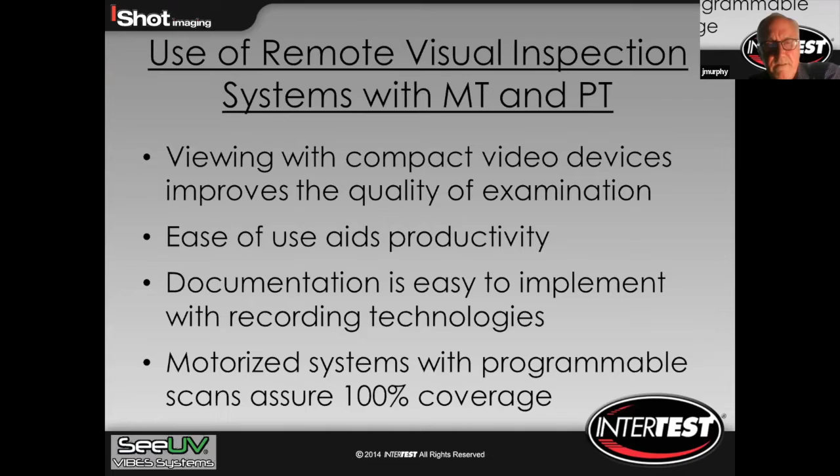There's a number of different ways to use the video equipment: both manually inserted and automated. Now we get into the motorized and programmable scans, and these become particularly interesting because they're completely repeatable, whereby we have a fixture that holds a part, and the camera will scan internally or externally as the case may be, and we can repeat that same inspection on thousands and thousands of parts.

As I mentioned a few moments ago, internal surfaces definitely pose challenges to any examiners, and compared to the traditional mirror on a stick, we can definitely do a lot better with the video components.

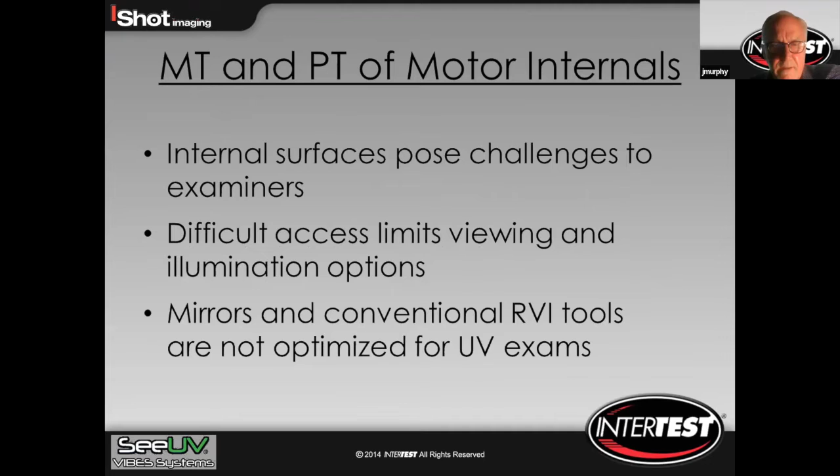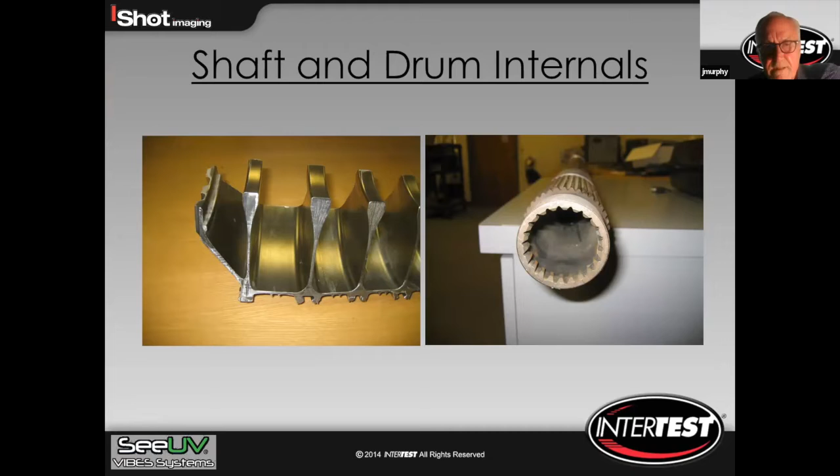We also get into these components I started to describe a little earlier. Some of these probably look quite familiar to many of you: shafts, and internals of housings. This is a cross section, but with internal webs, and in many cases these have to be thoroughly inspected in all these webs. So with the automated motorized systems, we can set up a part in a fixture and just push the button and let the equipment scan the part.

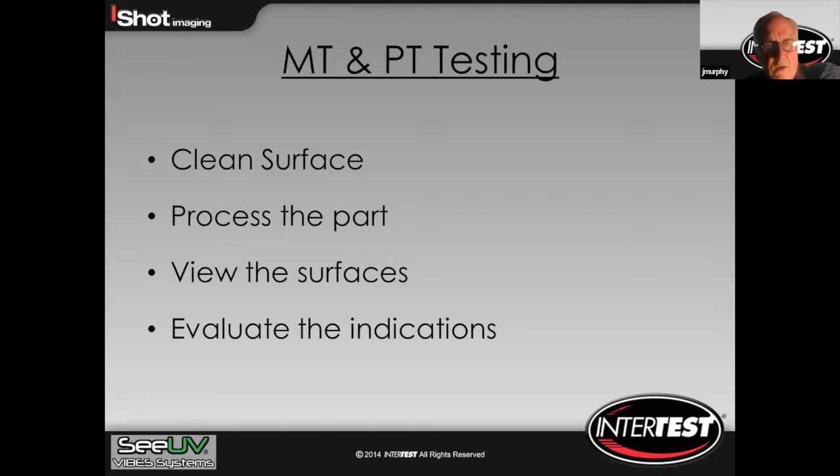And once the information is archived, the examiners can evaluate any indications and reject or accept the part. And in most cases...

Cameras are designed for white light, and UV tends to be hard to view, but we use filters, and it tends to really optimize the imaging and enhance the view for the operator. Now, again, it's a function of high quality equipment and control of the process, both moving the part and or the camera, to make a repeatable inspection.

Now, in terms of UV, in the same manner with white light inspection and optical equipment, resolution of optical equipment is measured worldwide. What we call the gold standard is the United States Air Force 1951 resolution chart. And it's just a chart. It's got lines, horizontal and vertical, in 9 different groups with different elements in each group.

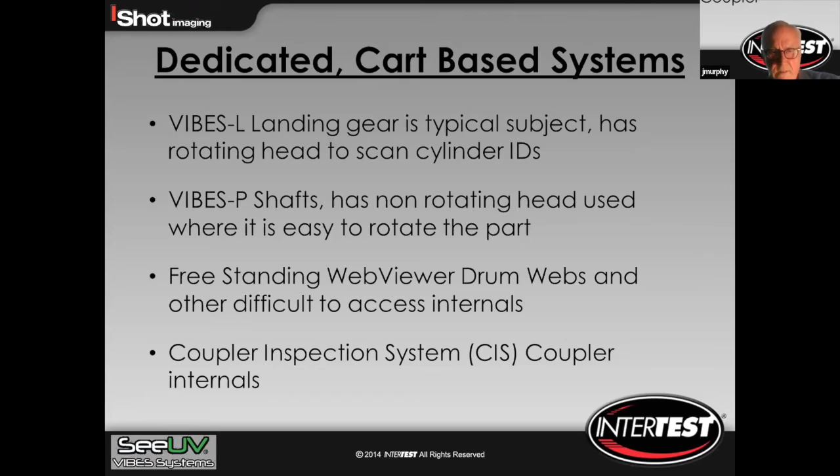So in its basic form, and many of you may have seen similar equipment, although I believe currently Intertest is one of the only manufacturers in the world of these types of systems. This system shown here is a cart-based system where we have the camera control programmer system, viewing monitor, recording and lighting systems, all on a cart. This particular one is designed for landing gear inspection.

Now, we can make these in various configurations, and it's available up to some of the longest landing gear that I've seen, on the 380s and so on. They're 20 feet in length. We can accommodate just about any situation.

And so just go back to the cart. In the landing gear situation, this pole, this system, is on two different axes, whereby we can raise it or lower it, and it would be inserted through the internal section of the landing gear assembly. And when it's inserted, it can be orbitally rotated. The insertion pole can be orbitally rotated, so it can scan internal circumferences and various diameters. We can accommodate various lengths, direction of view, and just any configuration that you can throw at us, we can handle.

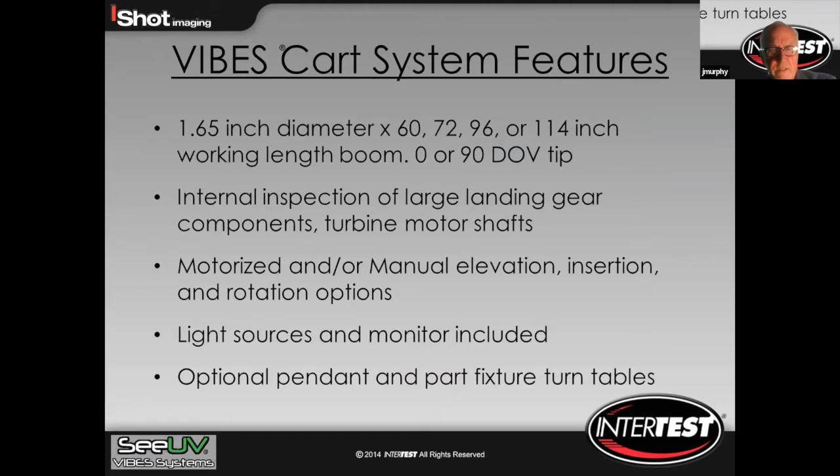So, and now similar situation, this would be for a drum or a cylindrical part. And in this case, instead of inserting it through a landing gear, this is in a drum with webs inside, and the camera will scan, and the operator can view and store the images.

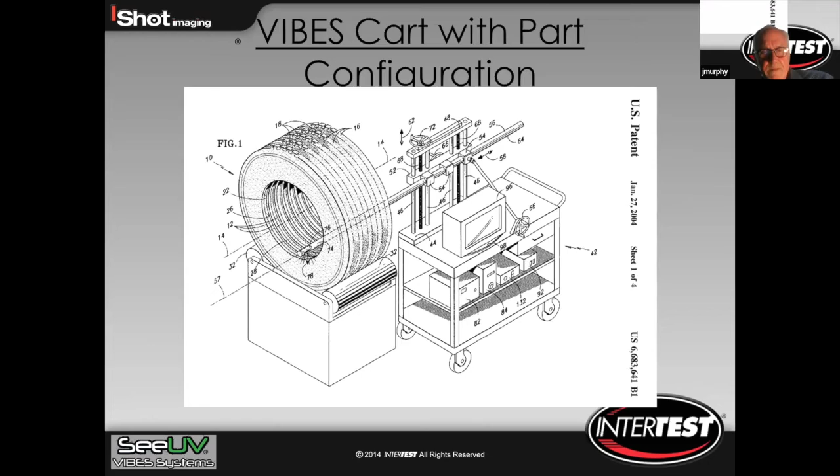Generally speaking, for the part shown here in this depiction, we would have a proper jig made up to suit that part, and the actual inspection process is programmed so it's repeatable. So at the push of a button, the operator can repeat 10 of those parts in exactly the same manner and create a log of the inspections.

The cameras, for many of these inspections, we build right in our New Jersey facility. They're high resolution - we're into the millions of pixels now in terms of image quality. Definitely in your HD high definition range, with both UV and white light on the tips. In the side view configuration, exactly the same idea. Again, all built in America.

The cameras also have a device to quantify the size of a defect. We have a series of little tabs that go in front of the image, whereby the operator can apply the tab in front of the image and say if it's a 1/8 diameter, 0.125 diameter indication or smaller. It takes the guesswork out of it. It's not a true measurement function, but it certainly will give the operator an indication of what size defect he or she could be dealing with.

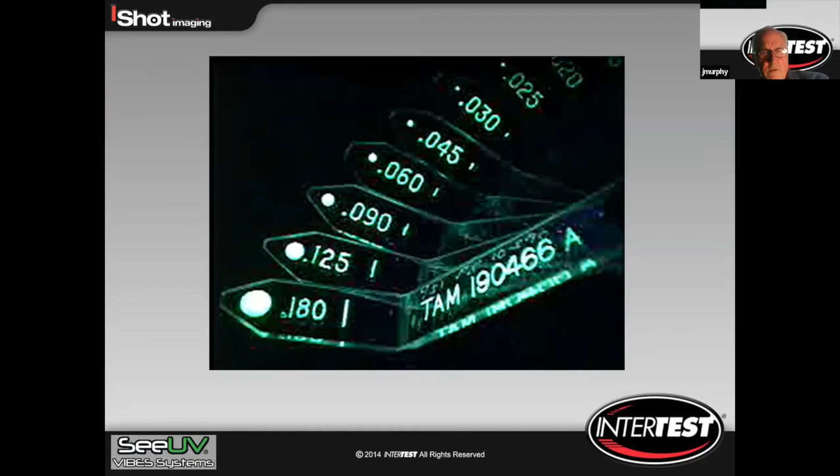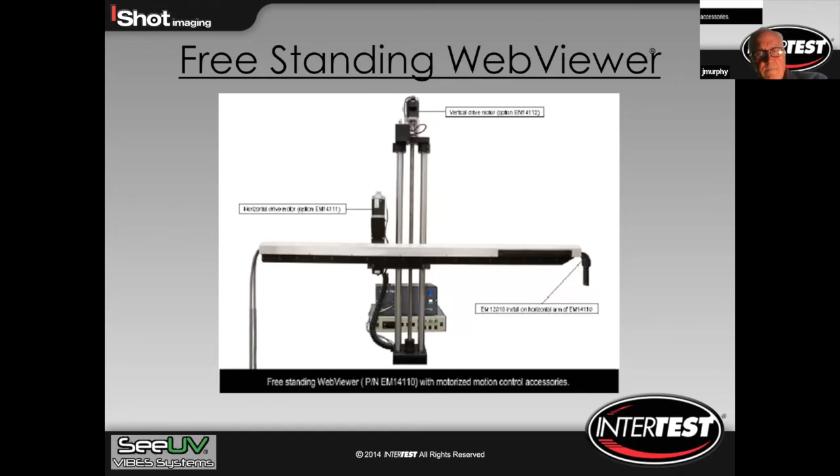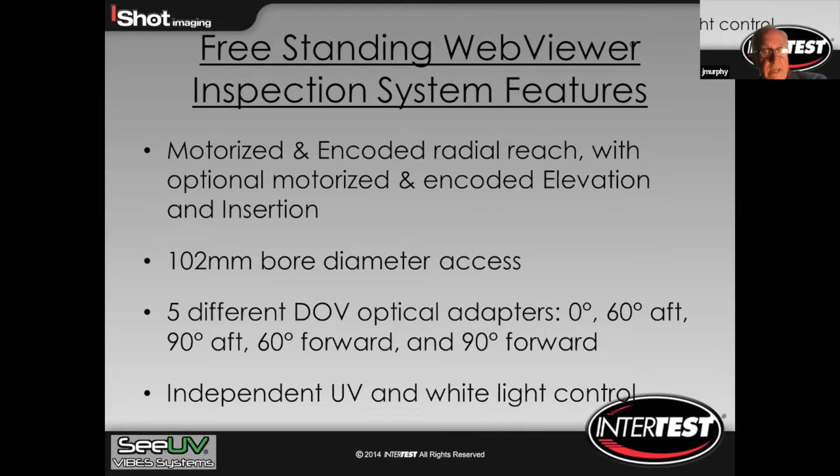Now, when we get into some of the more complex parts, same idea, insertion on a couple of different axes, but the camera position is arranged a little bit differently. As we go along, I'll show you with the web viewer. We would go into a bore, and the camera will turn to a 90-degree side view type position, and we can use white light and UV on these systems as well, switching back and forth.

So you can see here a pretty good depiction. The camera is rolled out through an articulated sheath that will deploy it right down in between the webs. Very, very simple, again, automated. When placed inside the part, at the push of a button, this system will just go through its cycle and view between every one of these webs.

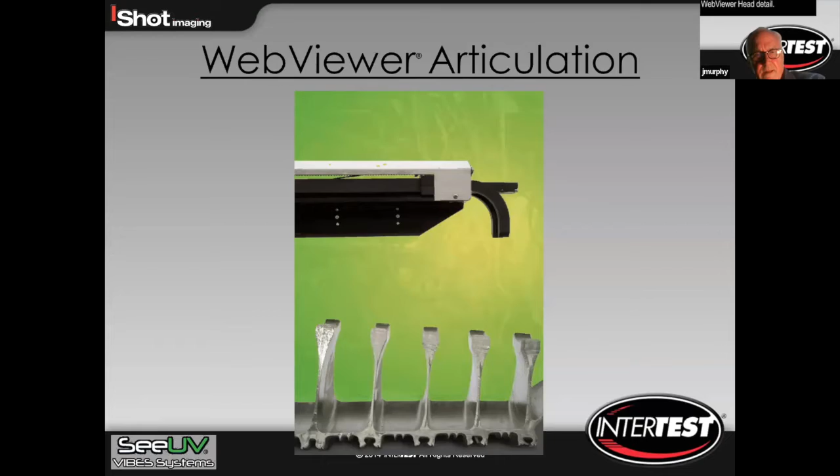I have a little better idea of what we'll be doing with the cylindrical components, and I think it gives you an idea if you just think about how difficult these parts would be to inspect in a more traditional manner with a mirror or just by eye. So again, it's repeatable. We can store all the images and create an archive for the whole life cycle of the component.

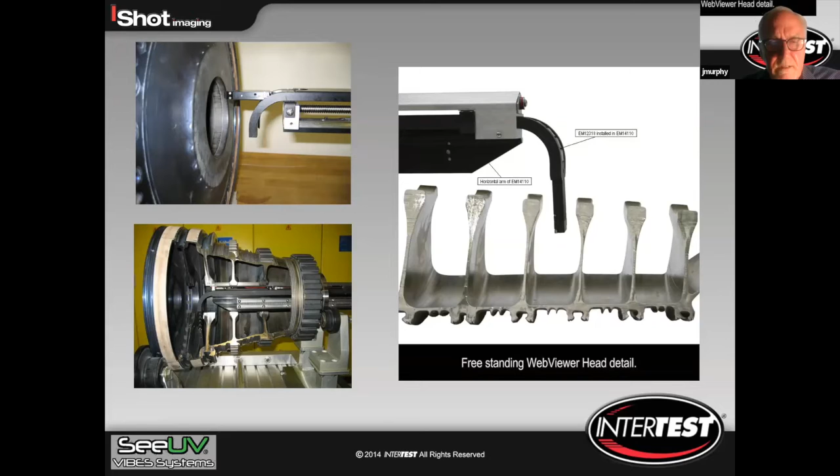There's various different configurations, so really we can see at any angle - 0 degrees, 60 degrees, 90 degrees - whatever suits the situation. And very simple cart format, both in manual and fully motorized carts.

I'm not sure what is in use in many operations in Mexico, but these systems are very, very common at the MRO shops throughout North America and Europe. Many of the major manufacturers in their MRO operations use these every day.

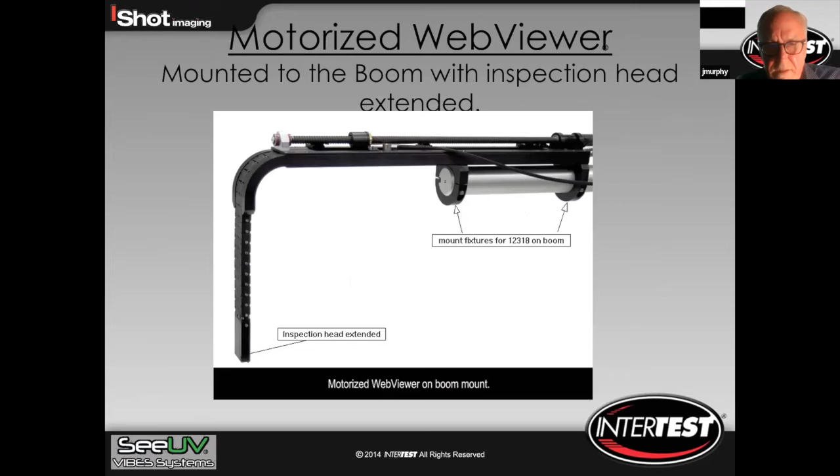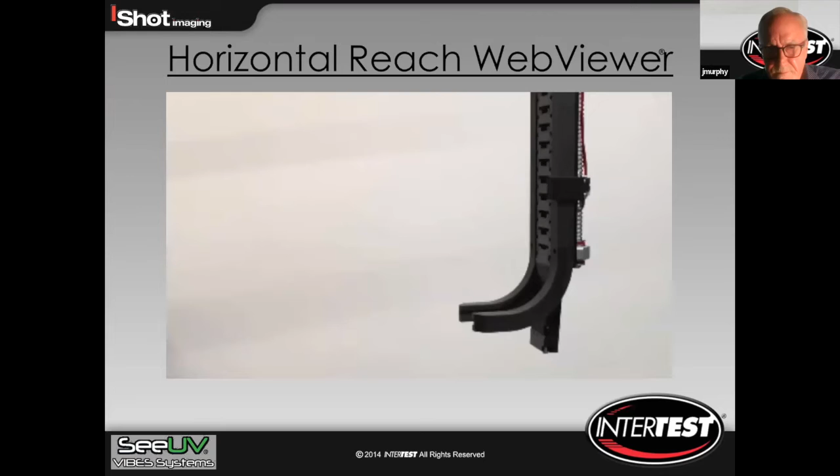A little more detail on the camera boom and so on. It's just a very simple device, and controls - there's both wired and wireless remote controls. We can configure these also to do cylindrical parts in a vertical position. So really, whatever you can throw at us, we've either done it or we can do it.

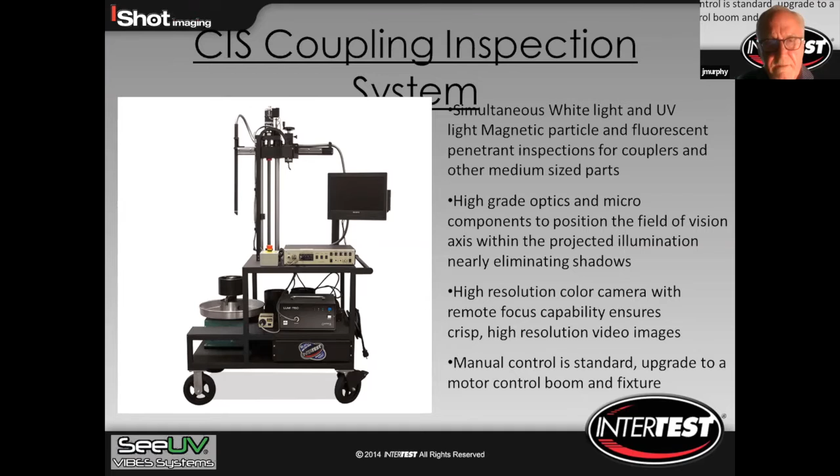As I said before, the traditional UV fluorescing inspection is well known for many, many years - most of the last century, people were using it as an inspection technique. But on the motorized cart systems, we've been manufacturing these for only about 25 to 30 years now. So it is just really catching on everywhere.

Various other fixtures and so on. Now, in addition to the carts and so on, we still use and recommend a lot of UV instruments that would be more of a manual process - the video or UV borescopes and pole camera systems.

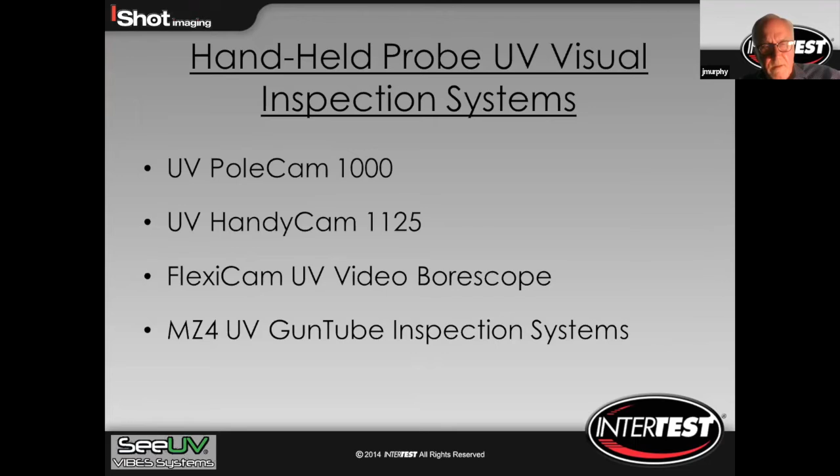Here's a good example of a manual system for manual insertion on simpler parts. This can just be deployed by the operator and manually rotated and so on, capture the images, store them on the DVR that's built in.

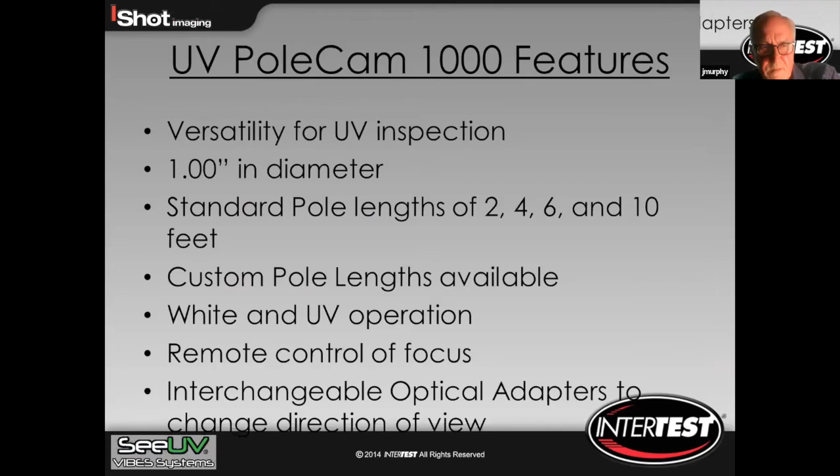And pole cameras, again, we make them in many different lengths. I think I've seen them over 24 feet in length for various applications. All that is in our New Jersey location, with different tip adapters to suit just about any situation.

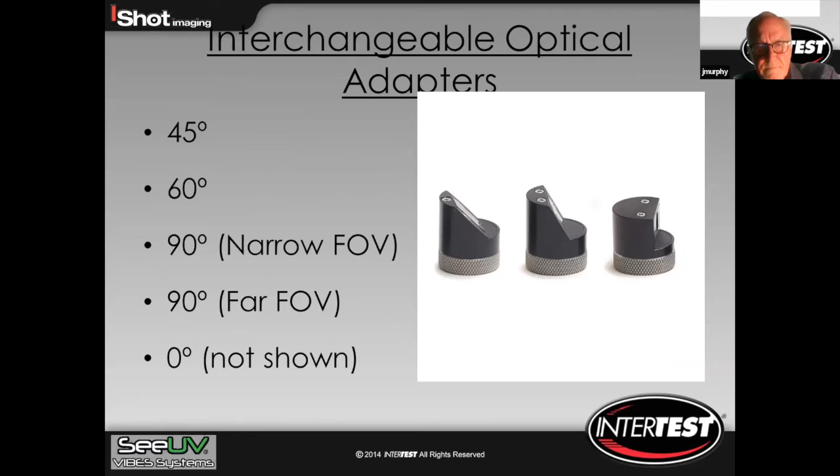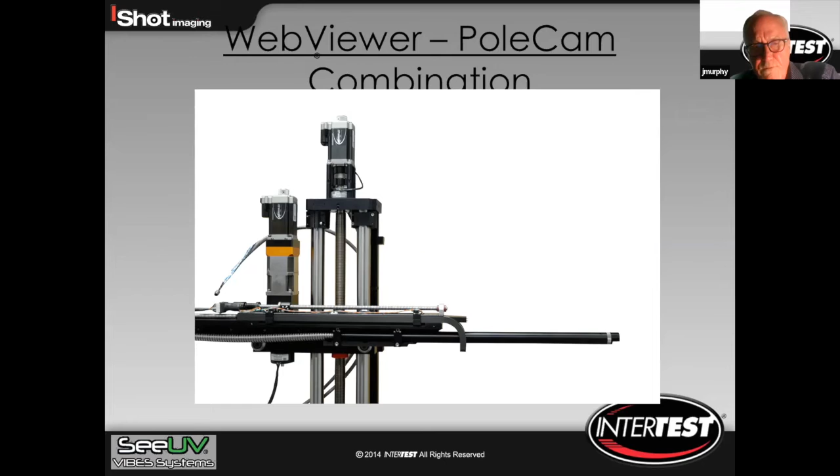The two systems that I was showing you, both the pole camera and the system for the web viewer, they can be totally combined. So we have many customers that like to have a very versatile system. Whatever the customer's needs are, we certainly build them. They can be quite complex, then right down to some of the simplest instruments, as I'm showing you right here, for manual handheld insertion.

This particular unit here would be generally used in addition to the more traditional handheld UV type inspection, where an operator can simply hold the HandyCam and view the images of a surface that he can reach with his hand manually. You could control the focal and zoom and so on.

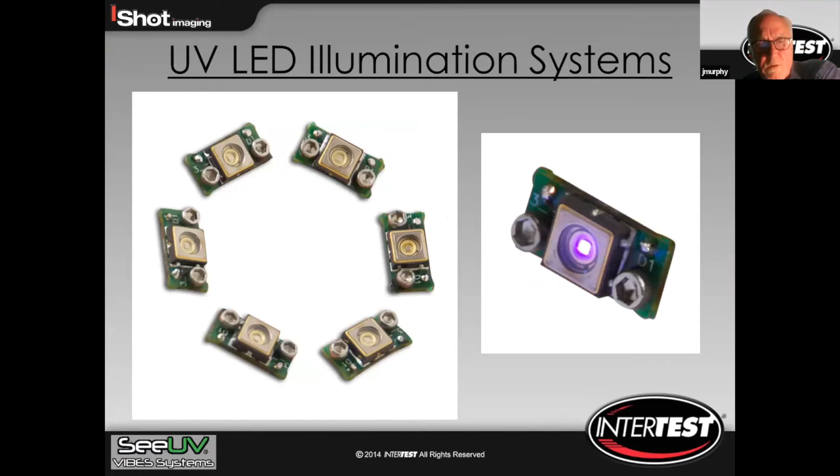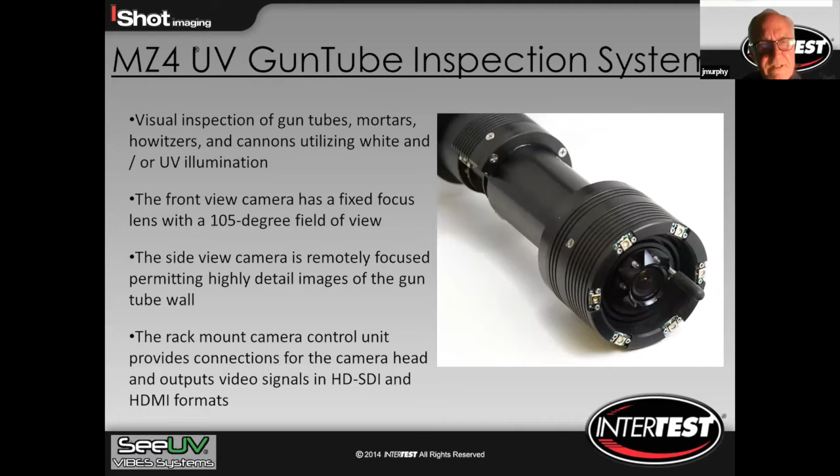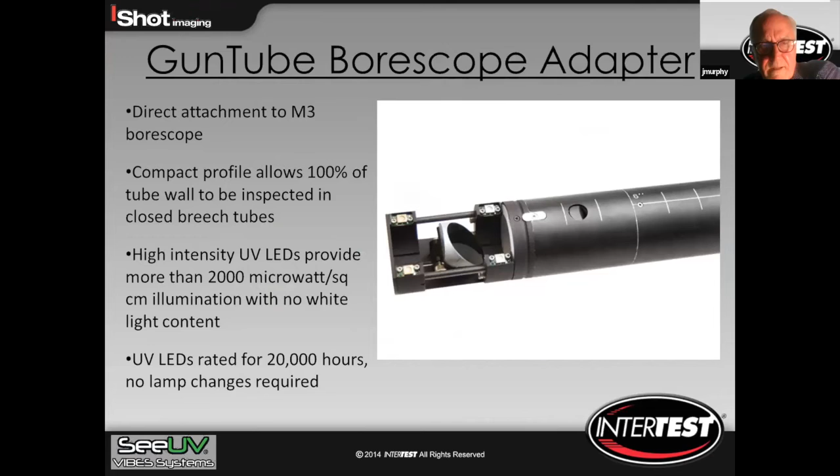Now, this is not really connected to the aerospace industry, except just to show other applications that the same technology is used for, and it could be for guns and cannons and so on. We do a lot of the smaller video instruments also for many different applications, especially these days.

I've been quite busy the past few years with a lot of the OEMs, but also the supply chains to the OEMs with magnesium and aluminum castings, which traditionally the internal passages were always done with white light. Now I've seen a big move to use video scopes, small diameter scopes with UV light in the passages, and they're looking for linear cracks due to the casting process with magnesium. In certain cases, the oxide film that forms in the casting process can cause indications, almost impossible to see with white light. We go to the UV light on those passages, and it just enhances everything.

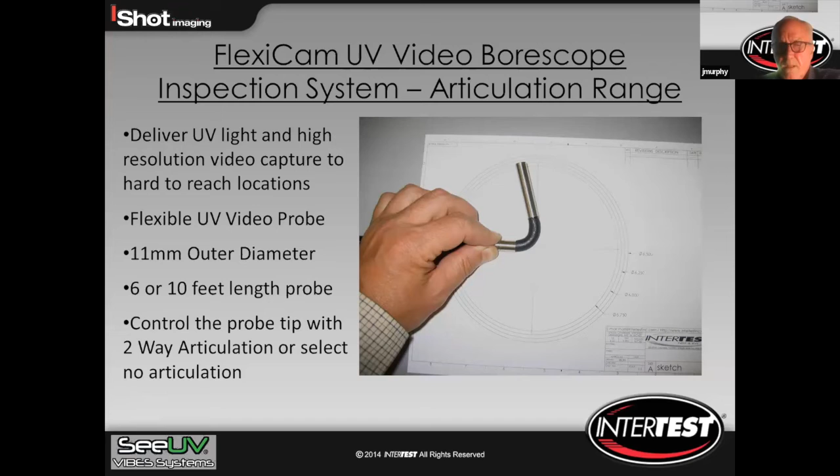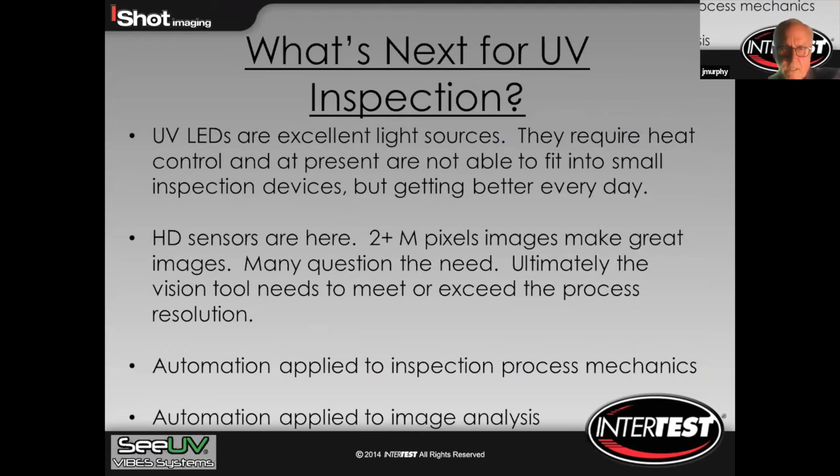Some basic things, as I was saying before, we certainly are on the cameras. We're well up into the HD range, 2 million to 4 million pixel imaging on all this type of equipment these days. So in many cases, it's even better than Hollywood.

Our objectives in all this equipment is really to take a position, especially in the aerospace industry, that we can match the requirements for the inspection required in a video automated or semi-automated process, and that as the video technology gets better, we can just continue to perform higher quality inspections. So it's a process that never will end. I think in 500 years, I'm hoping that we'll still be trying to make it even better.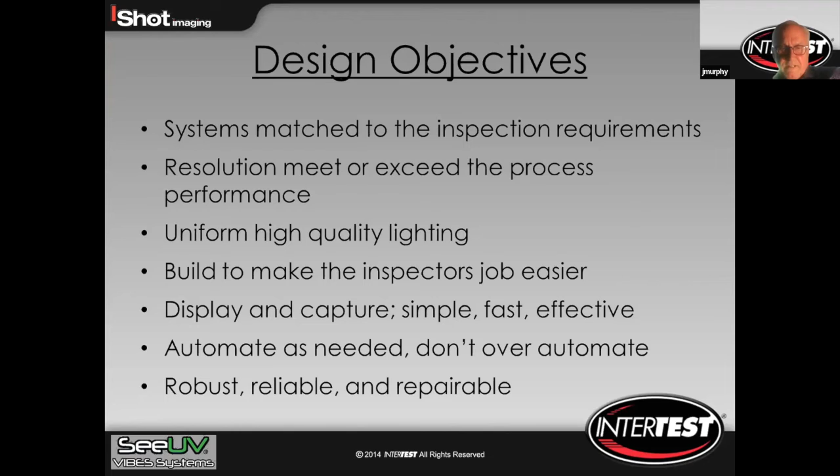It's been very interesting to see some of the improvements by the implementation of this type of technology, the improvements in a lot of the equipment that's manufactured, the OEM specs have become more stringent. Even 10 or 15 years ago, when we didn't have the technology to see certain defects, they didn't matter. Nowadays we can see it, we can't ignore the defects and so on.

Now, if anybody has any questions, I'm certainly delighted to answer any questions about the UV process, or any of the equipment applications. And beyond this webinar, certainly our representative, authorized representative in Mexico, IRS Inspection in Mexico, we work with them on a regular basis on many applications, and so they'd certainly be available to assist with anything. But I'm certainly open to any questions if anybody has anything at this time.

Well, thank you very much, John. It was very interesting to see how you can lean on this kind of inspections and UV, and how this has developed over the years. It is certainly very interesting.

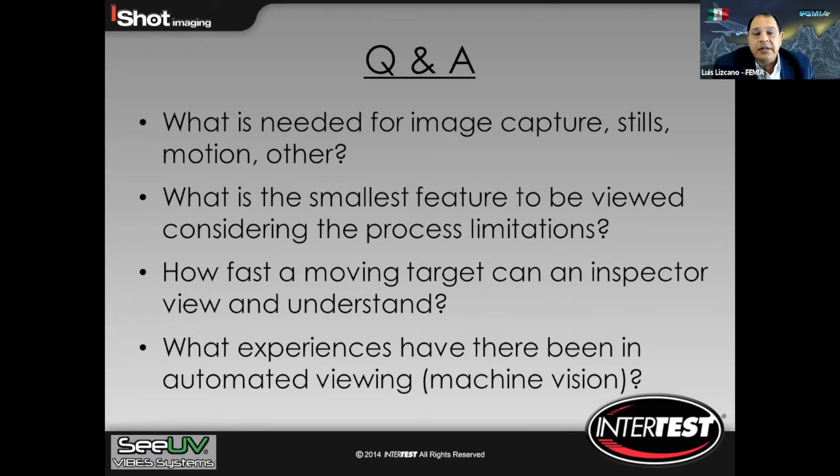I have one question, John. You mentioned that this UV way of inspecting has many years now. What is it that you foresee is going to be the future in this kind of inspection? What can we expect over the next 5, 10, or 15 years ahead?

Yeah, sure. One of the things that I've experienced already is that, let's go right back to what we call visual inspection, or remote visual inspection with the use of various instruments. Maybe some years ago, a lot of people would think that visual inspection may become somewhat irrelevant with the advent of radiography and other types of scans that could be used.

But in fact, I think with the improvements in visual inspection, again enhanced with UV light and so on, it makes visual inspection even better and more important in terms of being able to, on the basis of a visual inspection, accept or reject a component, or even at a minimum use the visual inspection as a qualifying step, whereby the operator may determine that there's further testing with radiography, as the case may be, beyond the visual inspection. So it's just continued to improve, and I think as video technology improves, the visual inspection will be more and more relevant moving into the future.